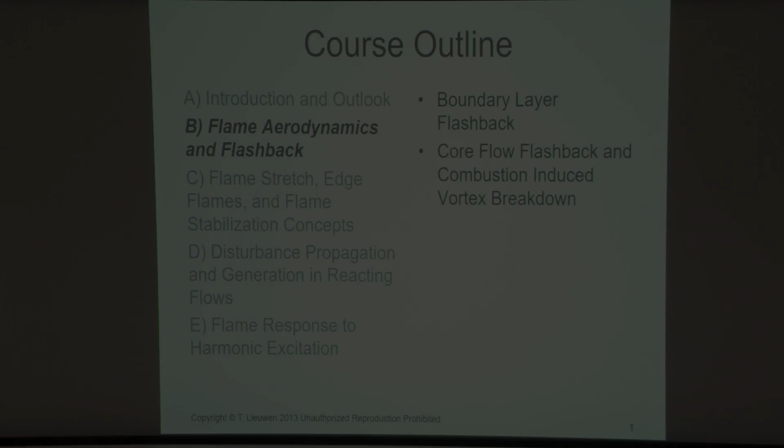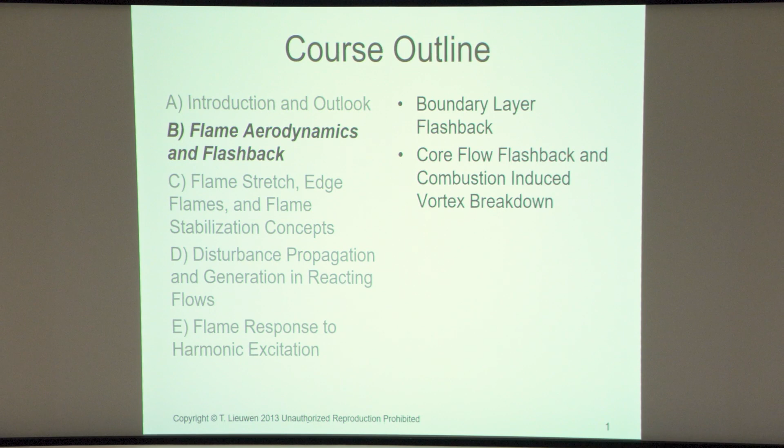I want to start the first topic, which is an application area, the problem of flashback. But it also introduces a lot of problems with what I'd call flame aerodynamics - how flames interact with and induce flow fields. Just because of the strong density jump across the flame, it really changes the flow field both after and in front of the flame. Subsonic flows, the flow in front of the flame can feel that flame, and react to it.

So just quickly, I want to introduce a couple definitions here: flashback and flame holding. Flashback is what I'm actually going to talk about - that's the upstream propagation of a premixed flame into a region not designed for the flame to exist. Notionally, this occurs when your laminar flame speed or turbulent flame speed exceeds the local flow velocity.

That sort of obvious-sounding statement actually becomes really complicated, because you have to ask: what laminar flame speed and what flow velocity? First, there's not one laminar flame speed - there's a whole continuum, because most laminar flames are what we call stretch sensitive, meaning the flame speed changes with curvature. Particularly hydrogen flames, the flame speed can change a lot, like a factor of 5 or 6, by curvature.

The second issue is what's the reference flow speed it's propagating into. That's not necessarily the approach flow, because as I mentioned, the flame changes what's in front of it. The flow field is subsonic, so the actual reference flow speed can be quite different. That's what makes this problem so rich - we'll start by just assuming laminar unstretched flame speed and reference approach flow velocity are our reference velocities, but then we'll add more to it.

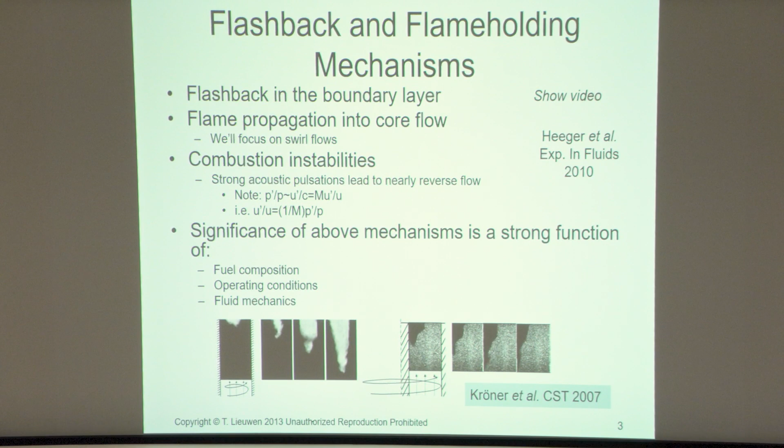What also makes this interesting is there is not just one mechanism in any real flow by which a flame can propagate upstream. It can flash back in the boundary layer, as you might expect. Obviously, in a boundary layer, the velocity has got to go to 0 at the wall, so there will be a point where the flow speed is less than the nominal flame speed. The question is, can the flame exist at that point in the flow, or is it so close to the wall that the heat losses kill the flame? That's really what controls whether flashback occurs in a boundary layer, because there will always be a point in the flow where your velocity is low enough. Let me show you a video here.

And just to, let me just show you a video here. We don't like to see that.

I'll show you some stills, screenshots.

The other thing that can happen is the flame can propagate in the core flow. In other words, if the flame can find a place in the bulk flow, away from the boundary layer, where the velocity is lower, it can shoot upstream. This sounds obvious, and no one would ever design a system where the flame could propagate into the core flow knowingly, because if the flow is going 60 meters per second, not even a turbulent hydrogen flame propagates that fast.

But what makes life interesting is as soon as you add swirl to a flow, there are additional physical processes whereby that flow shooting along at 60 meters per second can have the flame actually trigger a phenomenon called vortex breakdown, where it brings the flow in front of it to a screeching halt. It's like Moses parting the waters in front of it. It can actually bring the flow to a screeching halt so that it can propagate into it. Really interesting.

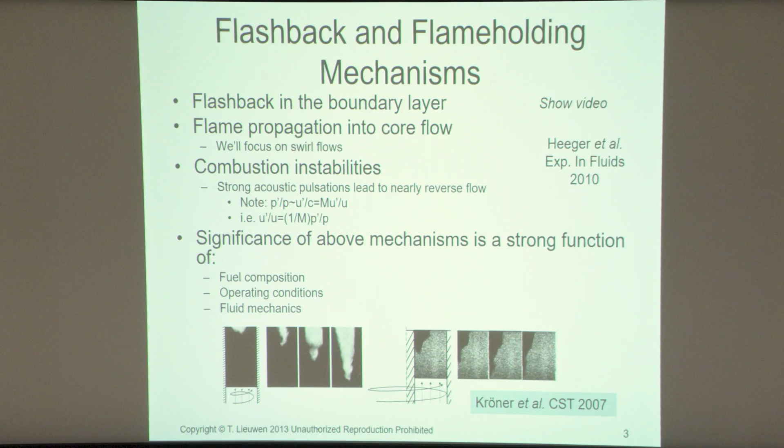Let's start with the classical treatment of boundary layer flashback. To do this, I'm going to make two really big assumptions. One is I'm going to neglect the effect of heat release. It's not going to be explicit why I'm neglecting heat release, but implicitly, the way I'm neglecting it is I'm going to assume I know the flow velocity profile. So I'll say, assume this flow velocity. But you might say, well, hold on, won't the flame change that flow velocity?

That's why I'm neglecting gas expansion, but we'll talk about what that does in a minute. And then the second thing is I'm going to neglect the effect of stretch.

So this might be an image of what the flame might actually look like. It's going to be pushed away at these higher velocities, and then it might look something like this, and then it'll quench at some distance delta Q. But in reality, this point on the flame that's curved is going to be different than the laminar unstretched flame speed. Basically, flashback occurs if the flame speed exceeds the flow velocity at some distance from the wall.

So we'll call this delta Q, the quenching distance, if the velocity at y equals delta Q is equal to the flame speed. This is the nomenclature from my textbook, but D denotes displacement speed - how fast the flame propagates with respect to the flow, and U denotes displacement speed with respect to the reactants. If that confuses you, don't worry about it. It just turns out that when you start to really think about stretched flames, definitions become important. But anyway, so the flame speed at that point.

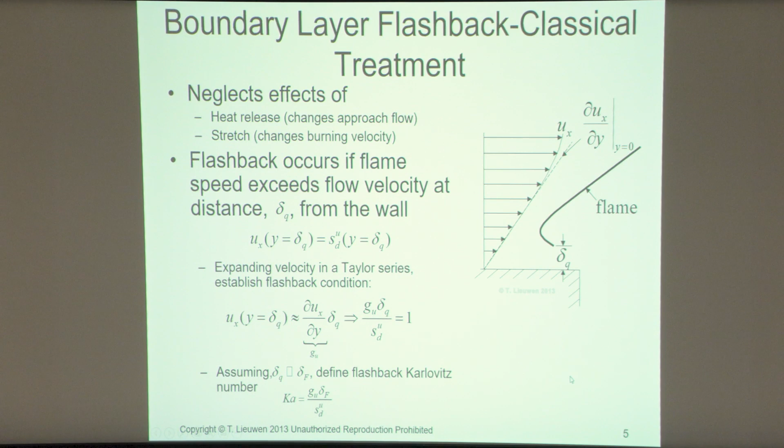Well, let's first talk a little bit about combustion aerodynamics now. As soon as a flat flame has flow approaching it, the flame doesn't change the velocity profile. But as soon as you start curving a flame, you change the velocity in front of it.

How many of you are familiar with something called the Darrieus-Landau instability? The Darrieus-Landau instability is a really interesting instability that you get in premix flames, whereby it's not possible to have a flat flame. You'd say, assume a flat flame, but the flame says, I don't want to be flat, because that configuration turns out to be unstable. And the reason for instability is very simple.

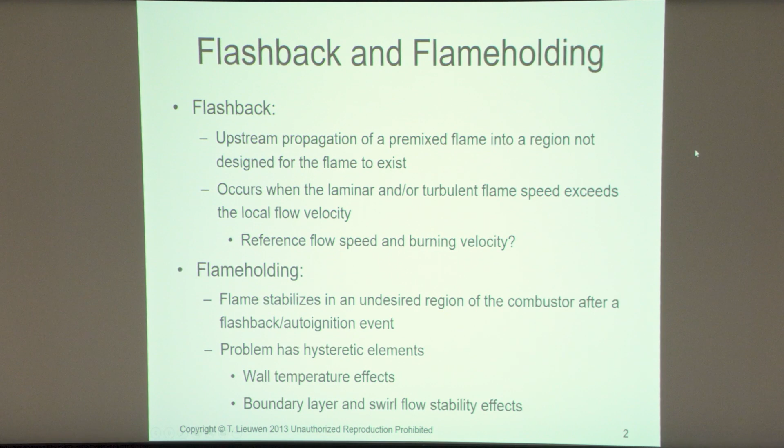But what you can see from this example, going back to this point I made earlier on what's the reference flow speed and burning velocity, is that the flow that the flame sees is not the nominal upstream flow in the absence of the flame. The flame changes what it's reacting to.

It's like the flame has a magic power. Like if I had this magic power, I could swim in a stream. You know, if you're seeing these images of Yosemite and these boiling streams, it's almost like if I could swim in the stream and make the water in front of me slow down, because I can't swim very fast. So instead of me getting shot downstream, I could swim upstream. This is what flames do, because they have gas expansion. The flames actually change the velocity right in front of them.

Mass is conserved, which means the flow is going to have to do something else, accelerate, but right in front of the flame it slows down, which creates a lot of really interesting things. There's a bunch of points I want to make, but let me jump into this one.

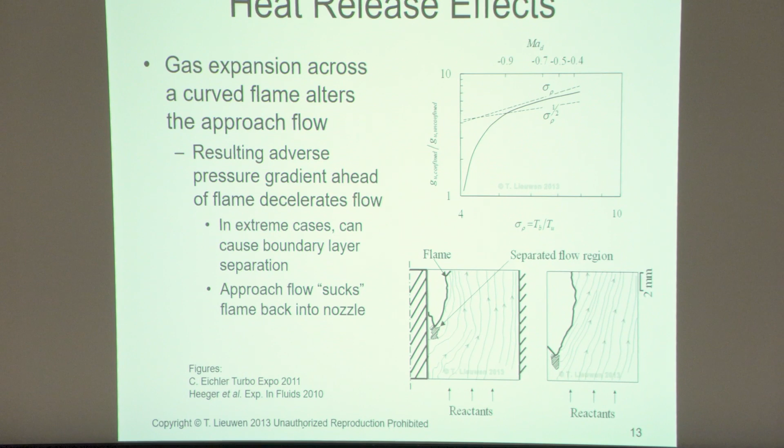If I jump ahead here, one of the things flames flashing back in boundary layers do is back pressure the flow in front of them. What do you all know from fluid mechanics class? What do boundary layers not like? Boundary layers do not like adverse pressure gradients. When you give a boundary layer an adverse pressure gradient, you can make it separate, right?

That's exactly what's happening in these images here. Really cool images from these papers, where here's a wall, here are streamlines, here's the flame, here's the flow, and you can see the flow getting out of the way of the flame. So it's slowing down. That part is actually where the boundary layer is separated, the flow is actually going backwards. So this boundary layer is actually pulling the flame into it. The flow velocity right upstream of the flame is actually going backwards, pulling the flame upstream.

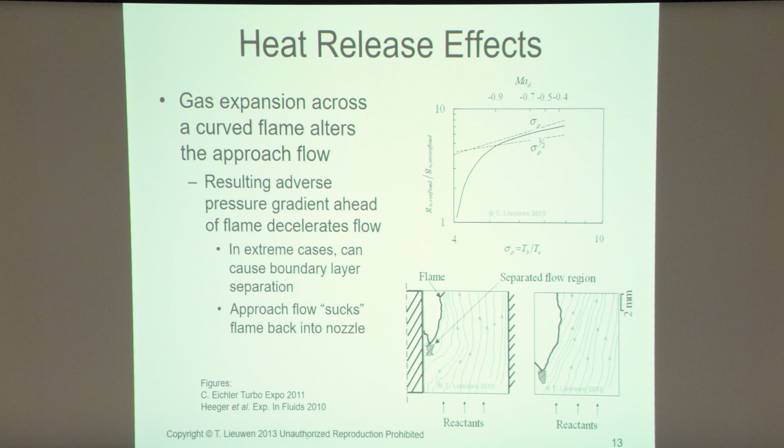So this is an example of flame aerodynamics, whereby the flame is decelerating the flow in front of it, which is a consideration that's not built into those classical scalings.

Let me back up now. So that's this point right here. The fact that flames get this coupled effect of flame curvature and gas expansion means that whenever you have a flame in a boundary layer, and if that flame is curved, which it always will be because the flow velocity is not constant - think about combustion one, sine theta equals SL over U - if U is changing, that's going to cause theta to change. So whenever you have curvature plus the effect of gas expansion, adverse pressure gradients lead to separations.

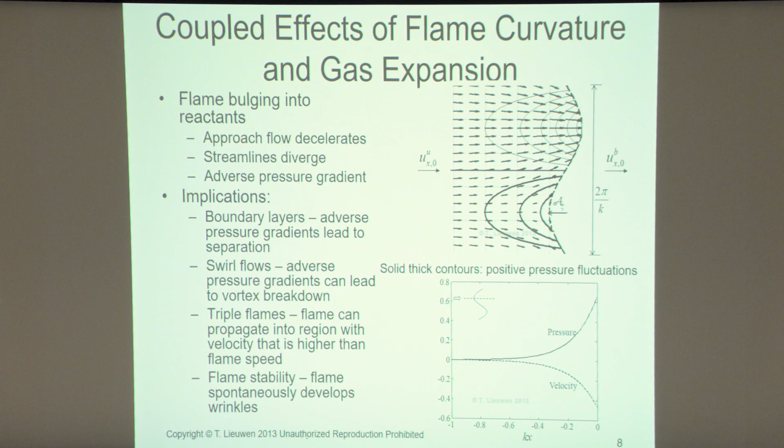Now, gas expansion ratios are really important for flame aerodynamics. Let me give you an example. Atmospheric pressure combustion with ambient temperature reactants, like if any of you are doing experiments in your lab, reactants at 300 K - if you have a flame temperature of 1800 K, you have a gas expansion ratio of 6. These are pretty typical numbers for lab scale experiments at atmospheric pressure with ambient temperature. So gas expands by a factor of 6.

This effect is really, really powerful. Think about aircraft engines where the air is not at 300 K anymore, but at 900 K. So now let's say the flame temperature is 1800 K. 1800 K divided by 900 K is 2. Gas expansion ratio is about 2 in that device.

And so you can have very, very different controlling flame aerodynamics. The influence of the flame on the approach flow can be profoundly different depending upon that ratio of reactant temperature. It's hard to change flame temperature by too much, but you can change reactant temperature by a lot. And so where this really shows up is in things like augmenters, used on the back end of jet engines to get more thrust, because the air is really hot. You can have gas expansion ratios more like 1.5, so fundamentally different flame fluid mechanic interactions with those types of applications.

I'm going to now, just to keep us on track, not go through all this stuff, but I'll give you one more example about swirl flows, again how this flame aerodynamics matters. And I'm going to use that in the application of how flames can flash back in the core flow.

In particular, I want to talk about swirling flows, because you might say that problem's kind of trivial - flame flashback in the core flow, why would you ever design a flow where the velocity is less than the flame speed? And you wouldn't. But when you swirl the flow, you get some interesting fluid mechanic instabilities. How many of you are familiar with the phenomenon of vortex breakdown in swirl flows? Okay, good. So the basic idea is, imagine a pipe, flow spinning.

We can define a swirl number, which I call S. There are different definitions, but basically think of it as the ratio of azimuthal velocity to axial velocity. Mother Nature has this really cool phenomenon, which is why the combination of fluid mechanics and combustion is so interesting: when the swirl number exceeds a certain critical value, you get a phenomenon called vortex breakdown.

So let's say you've got a pipe, the flow is moving 100 miles an hour through it. Once you get a swirl number of, let's say 0.8, vortex breakdown happens. What happens is you actually get a recirculating pocket of fluid in the center of the flow. There's no flow separation, but you get what we call an interior stagnation point.

So just to illustrate that, here I have this sketch. These are streamlines - I haven't drawn the azimuthal velocity component. I'll tell you in a minute why I've drawn this backward-facing step, but notice this is a stagnation point. The flow velocity is zooming along at 100 miles an hour, and it comes to a screeching stop. It actually stops, and you get this recirculating cell of fluid, and then the rest of the fluid, since mass is conserved, has to accelerate around it.

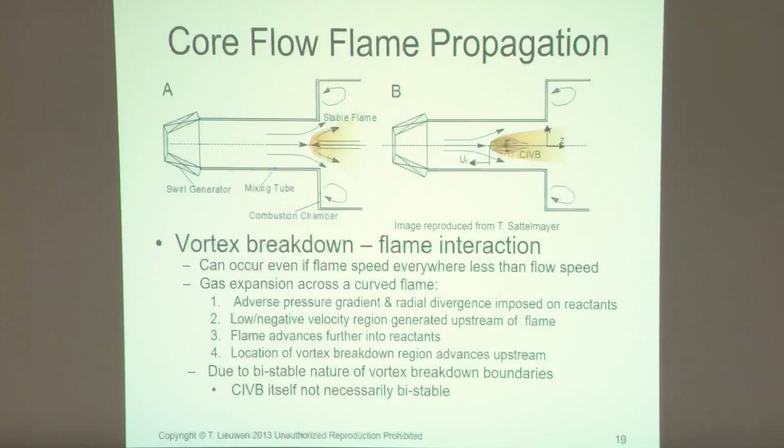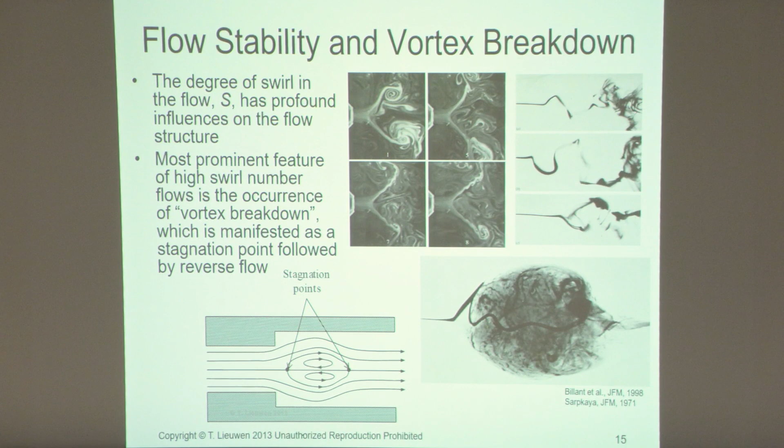Let's jump through this though. Let me just tell you why I drew this backward-facing step here. It turns out that if you have a straight pipe with swirl, vortex breakdown can happen anywhere along this pipe - it could be here, here, or here. In fact, if you did that experiment, you would see the vortex breakdown region kind of meandering back and forth. It turns out, though, that the mechanism for vortex breakdown is really sensitive to flow deceleration or adverse pressure gradients.

So by putting a little bit of a step in the wall, the base flow slows down because the area increases. And for flows to slow down, the pressure has to rise. That actually trips vortex breakdown, so it kind of locks the vortex breakdown point right there. It doesn't move, and so then you can stare at it and throw lasers at it and things like that.

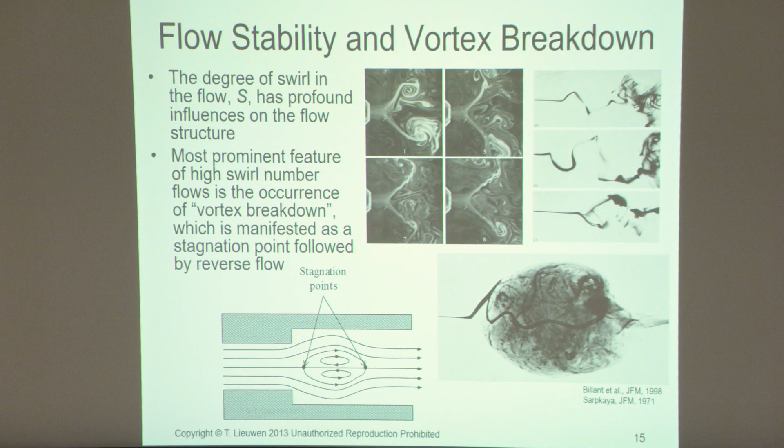Okay, so vortex breakdown is sensitive to adverse pressure gradients - we just talked about that. And what do flames do? They back-pressure flows. So now let's imagine a combination of flames and vortex breakdown. This is work from TUM, from Sattelmayer's group, who discovered this mechanism called combustion-induced vortex breakdown - you've got this vortex breakdown to stabilize the flow, to slow it down.

You've got this curved flame in front of it, and what the flame can actually do is trip vortex breakdown in front of it. So the flow's coming 60 miles an hour at the flame, and the flame essentially stops the flow in front of it. The flame can move forward, causes vortex breakdown to move upstream, flame moves upstream, trips again. So the flame can shoot upstream in the core of a swirling flow, even though the nominal flow, in the absence of the flame, is moving at a speed much higher than the flame could ever propagate.

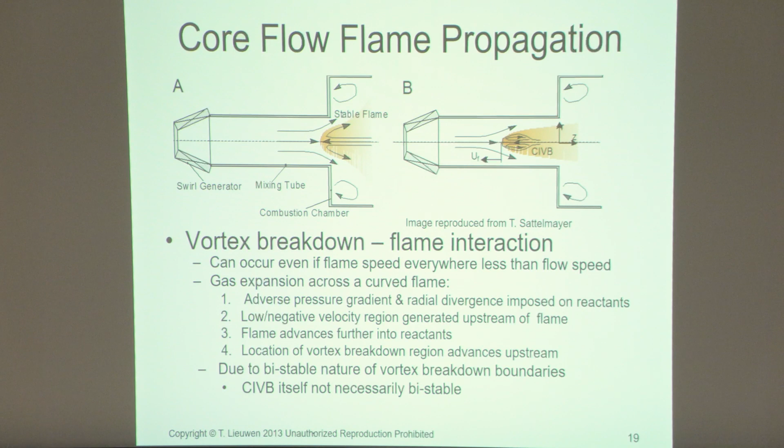Let me just jump back here. So anyway, lots of interesting applications of how curvature and gas expansion can materially change flow.

So just to summarize, we talked about flame stability, the Darrieus-Landau instability. This is really the only thing people talk about in existing textbooks, but also boundary layers, and now I just gave you an example of swirl flows. There's actually a third example that's pretty interesting that shows up in non-premixed systems.

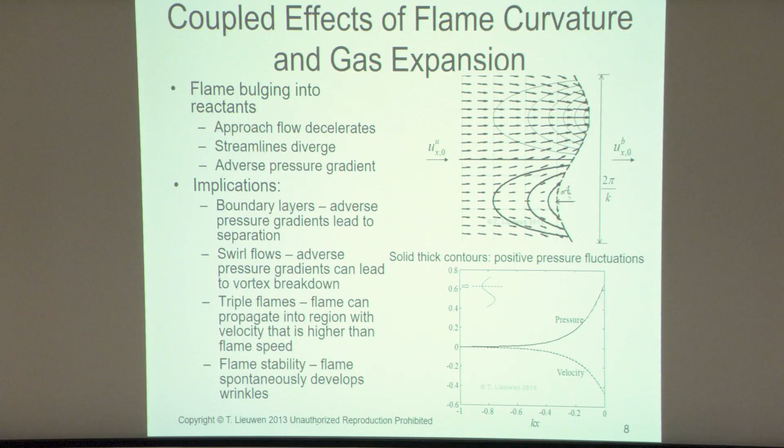Non-premixed flames, whenever you have a fuel and an oxidizer, as soon as the flame lifts, you get a certain amount of premixing, and you get what's called a triple flame. Where and how the flame sits is also profoundly influenced by this phenomenon. So, anybody studying triple flames or tribrachial flames?

Okay, so that's all I'm going to say about flashback and flame aerodynamics. It was more just to kind of whet your appetite. In my combustion textbook, I have quite a bit of material on this.

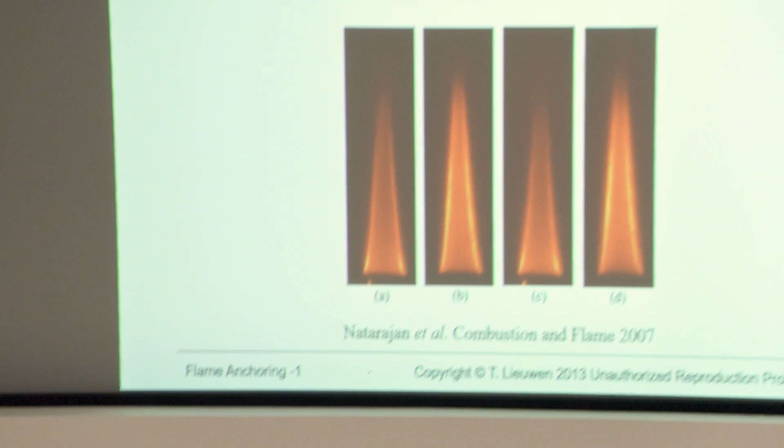But I now want to talk about flame stabilization, which is kind of a related phenomenon. And so jumping ahead, there's a lot more here that I'm going to get into, but I put a lot of extra material just based upon if there were specific questions.

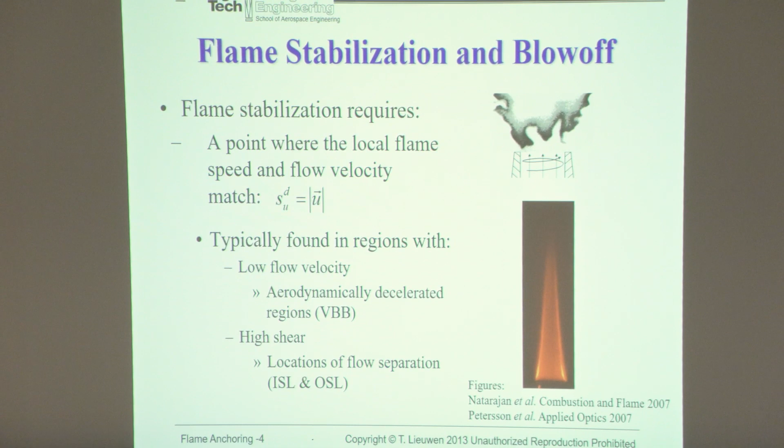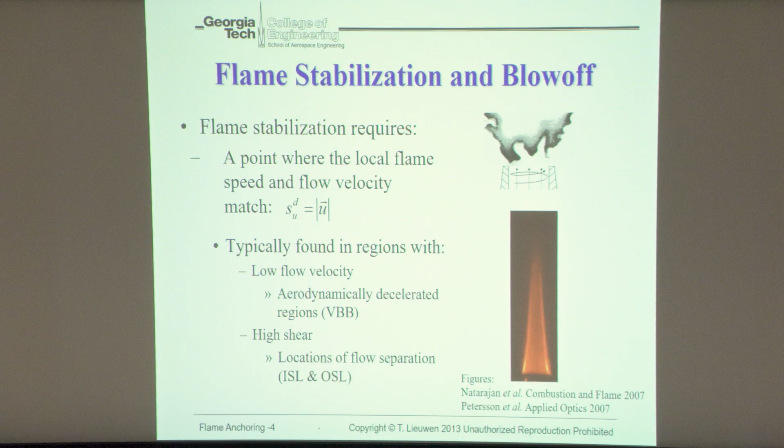How do flames stabilize, right? How is it that, like I said, we're going to talk in this class about steady flowing applications, so presumably the flame parks itself at a given position, doesn't move. Well, what makes a flame decide to park itself at a steady position and not move? What keeps it from flashing back, shooting upstream, or blowing off, moving downstream?

To have flame stabilization work, you've got to have a point where the local flame speed and the flow speed match, right? So the flame speed's got to match the flow speed. That's typically found in two places, regions where you have low flow velocity. One way that can happen is in what we'd call an aerodynamically decelerated region, i.e. flows with swirl.

VBB stands for vortex breakdown bubble, sorry for the undefined acronym. I have an example here, right in this image. So you've got a swirling flow, and the flame is just floating out in space. The reason it can float out in space is because I've got enough swirl in the flow that the flow decelerates, you get vortex breakdown, and the flame can find a spot where it matches the flow speed.

That's one way. The other way is in a region of high shear. So if you're in a region of high shear, basically what I mean is a point where the flow velocity basically goes to zero, near combustor walls. ISL denotes inner shear layer, OSL denotes outer shear layer, but the general idea is flames can sit in shear layers.

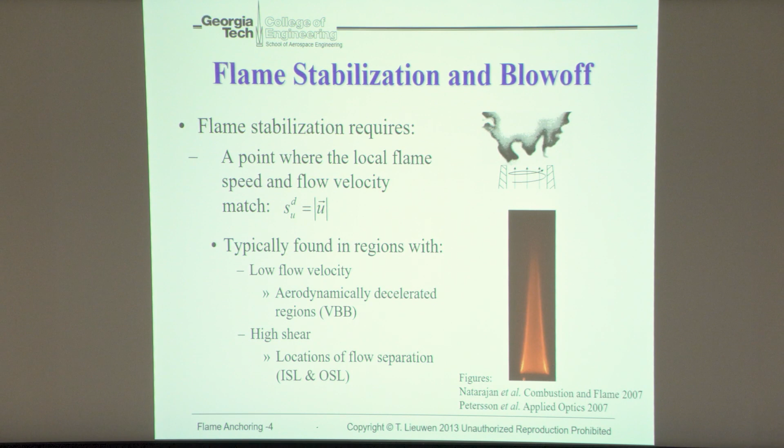So even though the core flow velocity in the bulk flow might be very high, at some point it's going to go to zero, and the flame can potentially park there. But because it's in that region of high shear, for those familiar with the concept of flame stretch, shear in flows modifies the flame's internal structure and changes their burning rates. If the shear is too high, it can actually extinguish the flame.

In the same way, configuration C would flash back, moving upstream, and if something doesn't change, it will continue moving upstream. What's special about configuration B is there's one spot where the flame speed and the flow speed match, and the flame parks right there. Even though the flame speed is less than the flow velocity at that point, the flame is quenched. And even though the flow velocity is greater than that at other points, that's no problem. The flame can anchor itself, and at other points it just swings to an angle where sine theta equals SL over U.

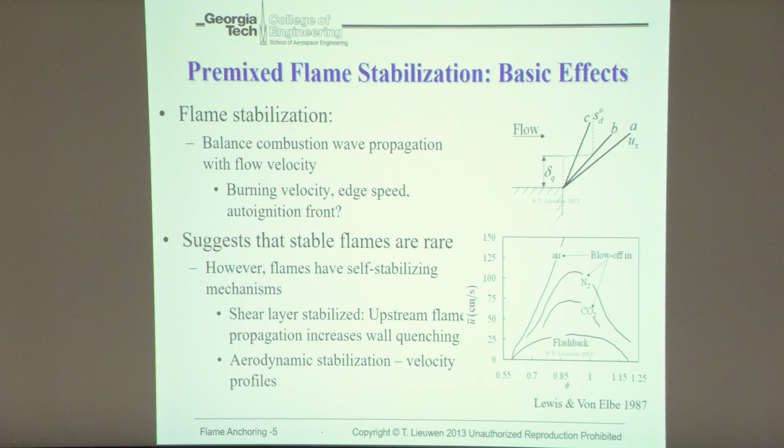I always like to use an illustration of me swimming in a river. The river's going a lot faster than I am. I can't swim upstream, but if I can anchor myself, if I tie a rope around my waist, tie it to a stake on the shore, my body will swing to an angle where my swimming speed divided by flow velocity equals sine theta. But I've got to have that stabilization point where they match.

Critical. But this also suggests that stable flames must be really rare, because they've got to exactly look like configuration B. If they look like anything else, it's going to flash back or blow off. But in reality, flames have self-stabilizing mechanisms such that if they start to flash back...

Heat losses can increase and they slow down. Or if it starts to blow off, other things might happen. So in reality, oftentimes what happens is the flame adjusts its position slightly as we're changing temperature, fuel composition, or flow velocity. It might move a little off a burner lip or move down, but it'll find that balancing point.

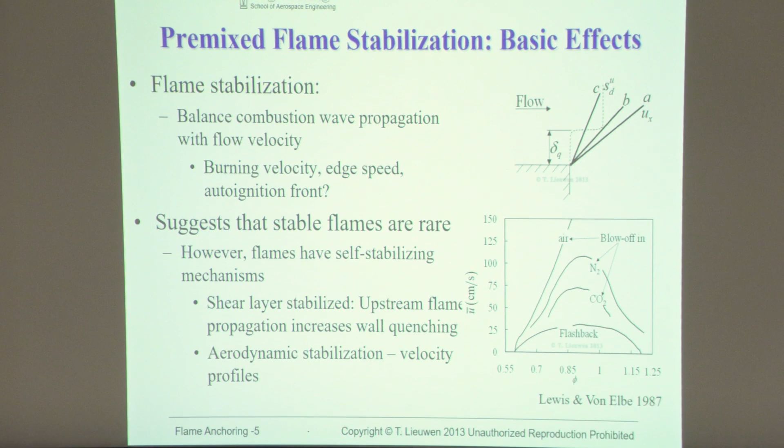But the key point is that the stabilization point and the spreading of the flame from that stabilization point are profoundly different problems. Totally different problems. And if there is no stabilization point, that flame will blow off.

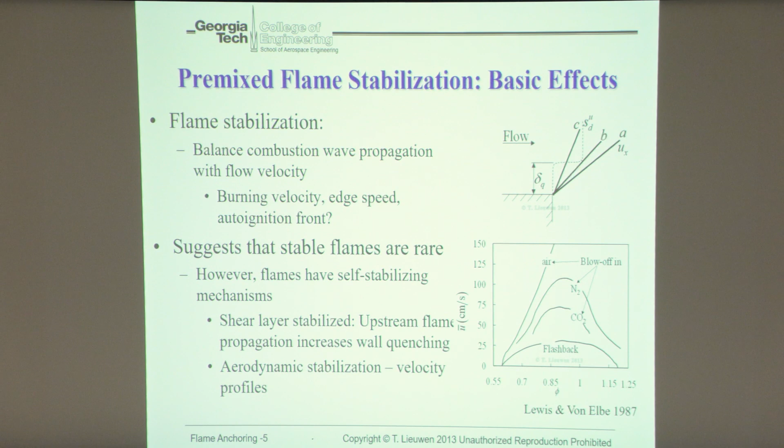In our PhD quals, I'm always amazed at how people don't figure that out, as they want to assume sine theta equals SL over U. Sine theta equals SL over U is fine if you have a stabilization point where SL equals U at some point. But if SL never equals U, there is no sine theta equals SL over U. The flame's gone, it's out of here—just like I'm shot downstream if I'm trying to swim in it, right?

If you're not careful, a swirling flow can give you reverse flow right in the center. So the way to deal with that is just put a center body in and it washes that out.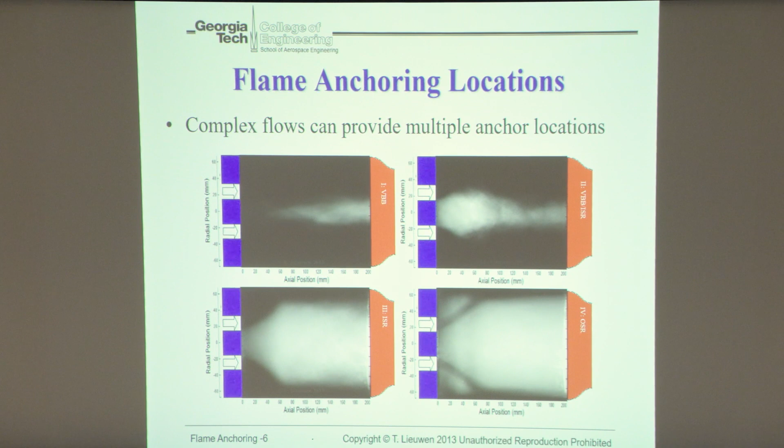So what we have here is a bunch of problems where there's lots of different flame stabilization locations, and where the flame sits is going to be a function of operating conditions, fuel composition, and so forth.

Oftentimes in reality, if I've got a really fast flame and a low flow velocity, I start at configuration D. The flame parks itself in the inner and outer shear layer. The flame's relatively short because it's spreading from two angles to consume all the reactants coming up.

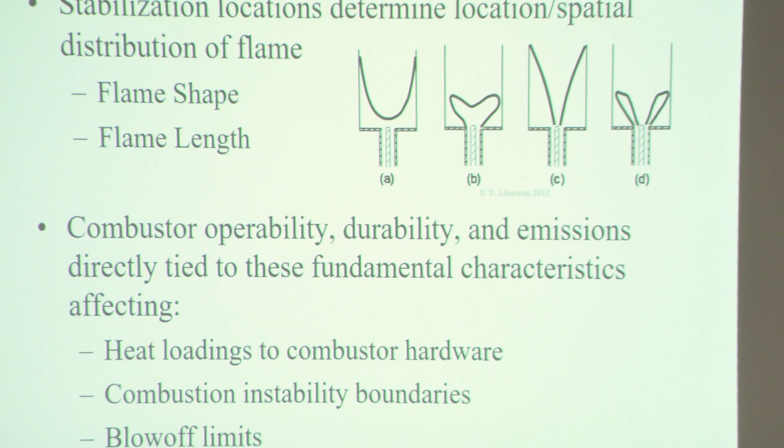But then what oftentimes happens is that as I increase the flow velocity, it turns out the shear layers have different thicknesses in those inner and outer shear layers due to swirl. The presence of swirl causes that outer shear layer usually to be thinner and have more shear, less friendly for flames.

So what will oftentimes happen is the flame essentially locally blows out. It doesn't completely blow out, but it can no longer survive in that outer shear layer. So I'll just be gradually adjusting velocity, and all of a sudden, bam, bifurcation - flame jumps from shape D to C. Flame doubles in length instantaneously.

Yeah. And so that's that.

And remember my comments before about pressure - where flames can survive changing with pressure, where that bifurcation will occur will be very different at 1 bar than at 10 bar, just because the flame can hang on longer at 10 bar.

Sometimes it's a little harder to do - configuration B is a little harder to find, but if you don't have a center body or you make it really, really thin, then you can also make D jump to B. And then if you keep dropping it, the flame may say, I can't sit in any of these shear layers, so it starts to move downstream, but it doesn't blow out because there's vortex breakdown. You'll see configuration A, and then it blows out.

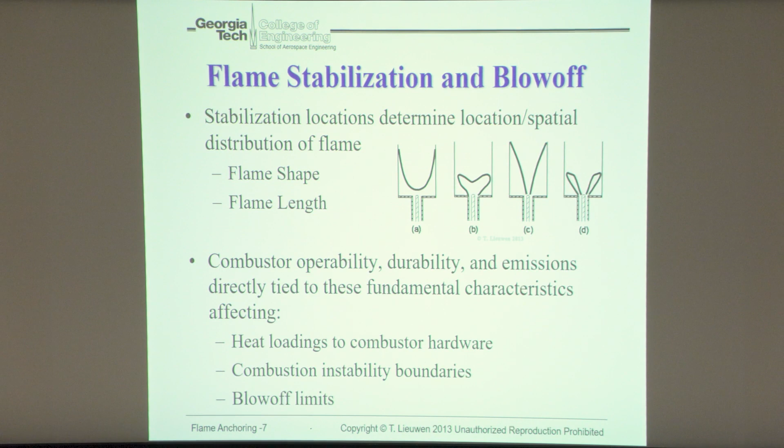So you can actually see the phenomenon of blowout is usually not just a single event - the flame's not just letting go. There are three distinct bifurcations that happen along the way. And as I'm changing ambient conditions, power setting, hydrogen and all this stuff, where it's going to be is going to be different for each configuration.

And each one of those things - we'll talk about this later - but for example, combustion instability limits. Combustion instability conditions are really sensitive to how long flames are. Configuration C and configuration D will be unstable under completely different operating conditions, and it jumps, right? Those flame shapes jump.